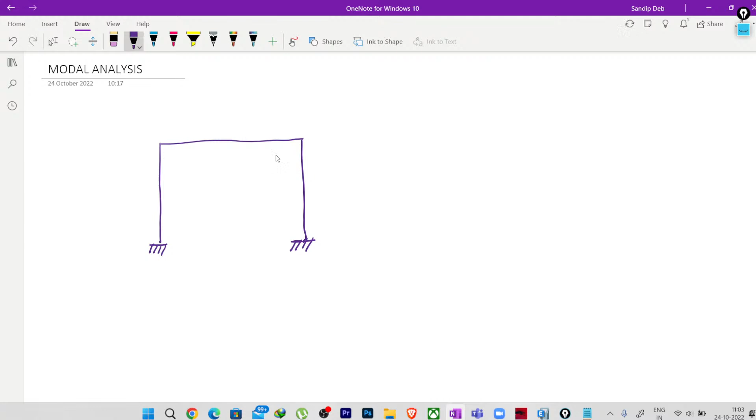So first, let us take a very simple frame like this. It is a very simple frame we have. Suppose this frame has total mass which is m1.

Now how do we idealize this particular structure? It is a 2D frame, suppose in x and z axis, the horizontal axis is x and the vertical axis is z. So how many degrees of freedom does this particular mass, or this frame, have? Can you tell me?

So it can move in this direction. You may say it can also move in the vertical direction if you have vertical acceleration, but that is a different topic. In general, if this particular frame can move or translate along the direction of x, we can idealize this as a single degree of freedom system.

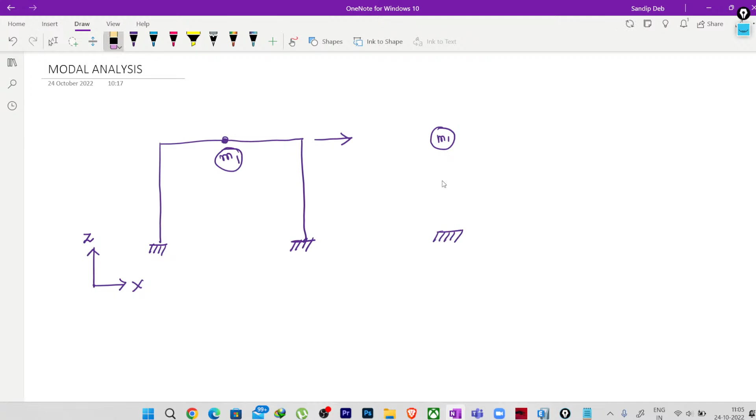So this is mass m1, this is y, and suppose we have some stiffness here, and it can translate along the x direction in both directions. Now if you provide or give any initial excitation to this particular structure -- suppose, as per Newton's law, if the structure is at rest, it will obviously always stay at rest unless we give some external force on it, right? So to make it move once, what you have to provide is an initial excitation to the structure.

Suppose we have given an initial excitation to the structure in terms of frequency, assigned to this particular frame here. Or let's not talk about frequency and make it complex -- let's just say we have given a push to this structure, suppose P. Okay, just give me 1 second.

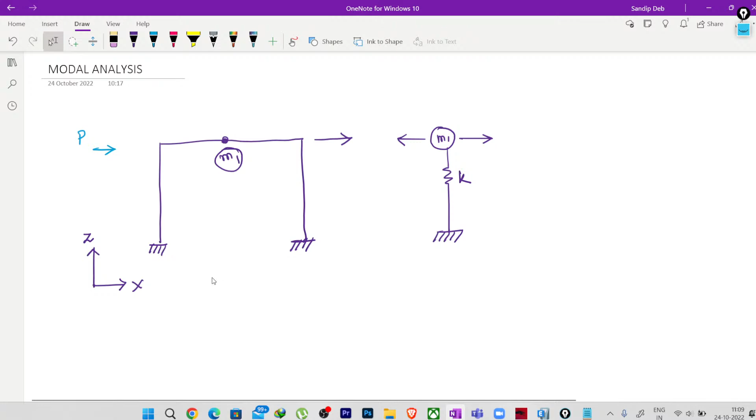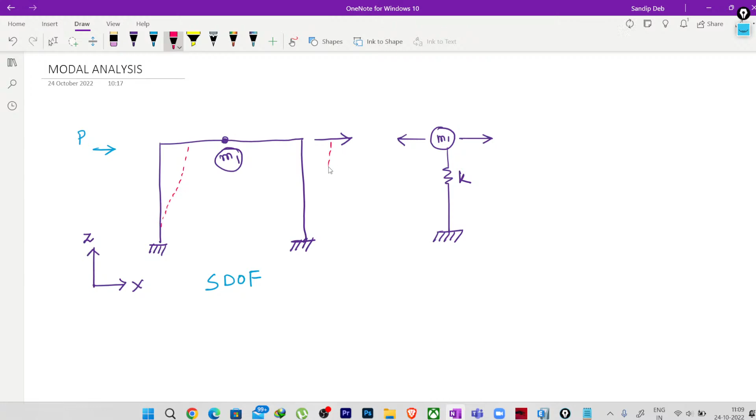This frame has one degree of freedom, so we call it a single degree of freedom system. Now if we give an initial excitation or initial force to this structure, the frame will start moving. How will it move? It will move to and fro, once in this direction and again it will come to this direction.

So we will get a displaced shape which is something like this, if we idealize this as a single... yes, is anyone telling anything?

If you have a question, you can ask me. Hello? Okay, so here it will move in such a manner. No audio, sir. No audio. Oh okay, sorry. Is it audible now? Yes, sir.

Okay, sorry, so what I was saying is that if we give an initial excitation to the frame, and as we are idealizing it as a single degree of freedom system, we will have this kind of behavior, that the structure will displace in this direction, and again it will move to and fro.

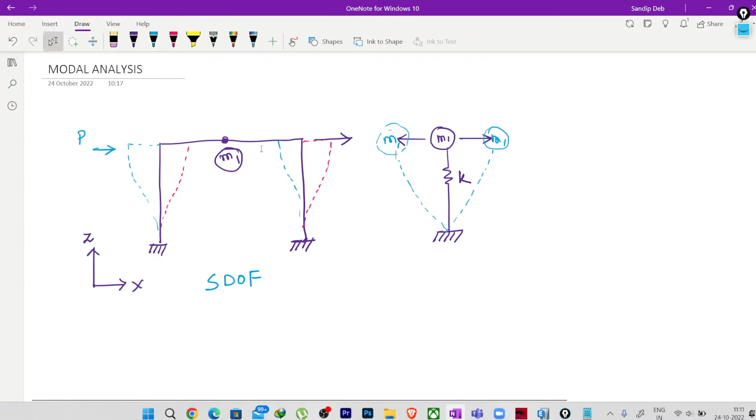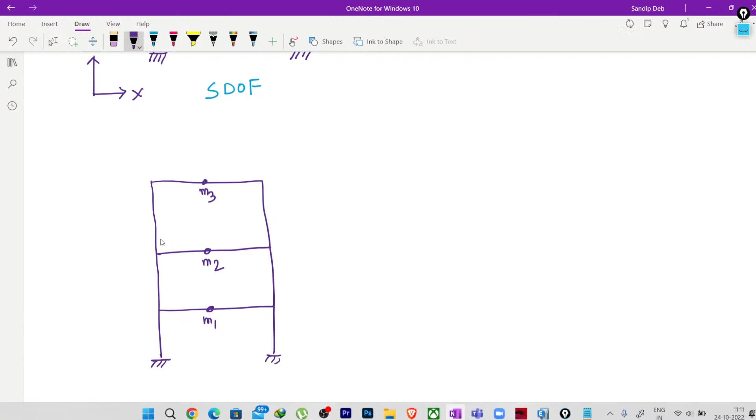Now let us take a frame where we have different masses and different levels. Suppose we have a frame like this, and now we have 3 floors. Here we have mass 1, here we have mass 2, here we have mass 3. So now how can we idealize it?

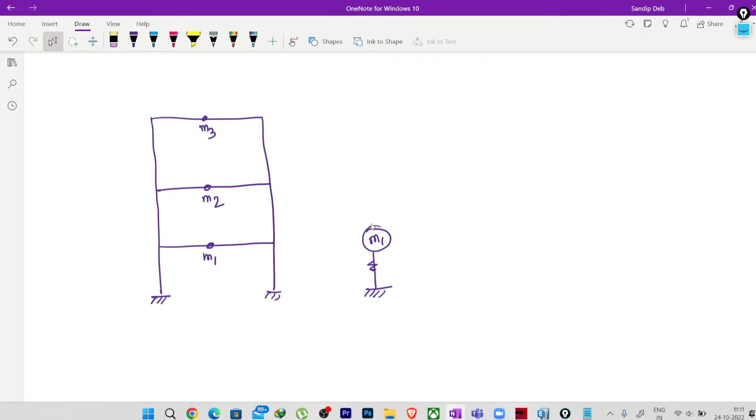If you see here, it will be something like this: Mass 1, suppose I'm not drawing the stiffness here, it is there, just M2, let me draw it so you don't get confused, and M3. So stiffness 1, 2 and 3 — these are the story stiffnesses.

This mass, where we are considering the mass of the whole particular story, is concentrated — this is nothing but the lumped mass. It is the point where we assume the whole mass of the story is concentrated. So why do we consider this at the floor level? Why not here, why not in between?

Because if you see, at the floor level we have the slabs, we have the beams, we have the slabs. So the more mass or more rigidity, we find at the floor level itself. Compared to the whole story, we have a higher amount of mass at the floor level. So that's why we consider the total mass of the story concentrated at this point, and this is nothing but the center of mass for this particular story.

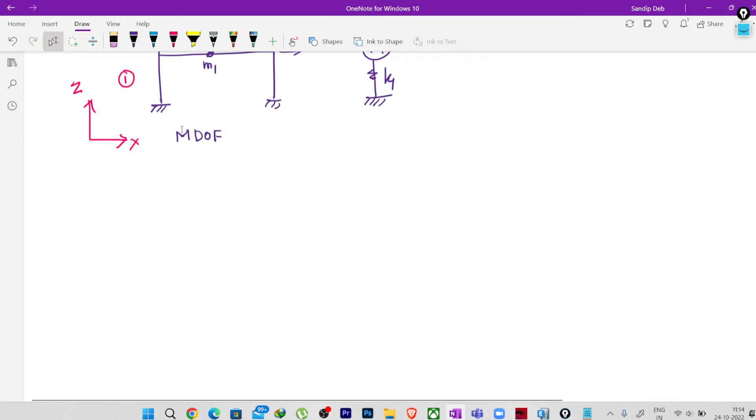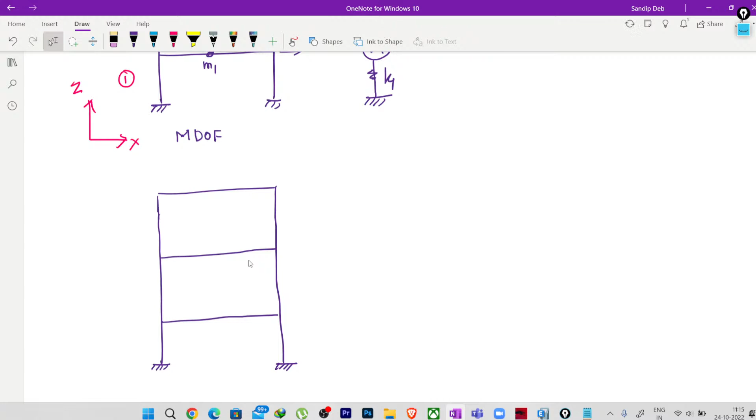So now, what is the expected behavior of a multi-degree of freedom system? Let me draw it again here. I will not go for solving those matrices, eigenvectors, or Ritz vectors here — I'm just giving you an insight into this concept. To understand the dynamics and mathematical formulation behind it, you can always refer to books, like Dr. Anil K. Chopra's, which is very famous for structural dynamics. You can have a look at it for better understanding of the mathematical formulation.

So now if I again write it: M1, M2, and M3, and we have given some initial excitation to the structure, what will happen? What we expect is that the structure will displace like this.

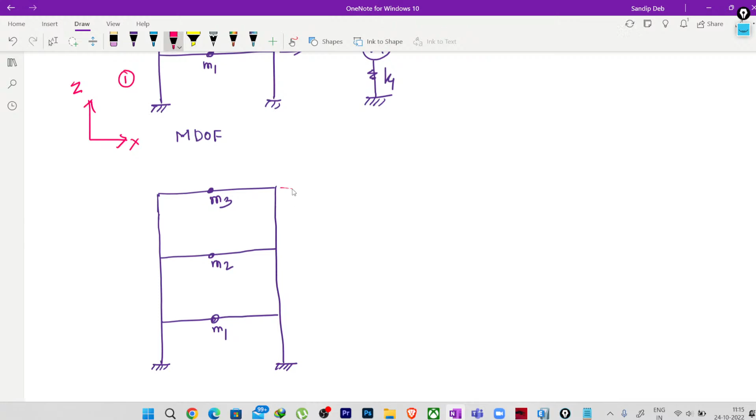Right? Okay, this is one behavior that we can expect.

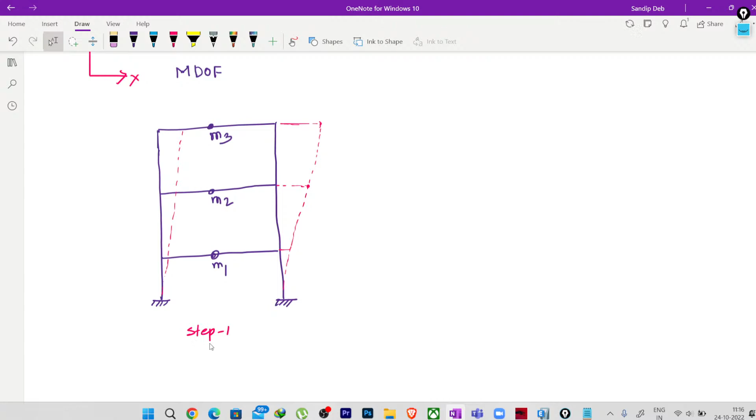So I'll write, suppose step 1. Okay, and we are getting these displacements at the different story levels. So if we consider this as direction 1 and this as direction 2, and if we consider this as story 1, story 2 and story 3, so how can we write these displacement shapes or the displacement values?

Suppose this is phi story 1 along direction 1. Okay, we can write this. Let me draw it in magenta color only, it will be better, I guess. So it is phi story 1 direction 1, phi story 2 direction 1, phi story 3 direction 1. Right, we can define these things like this. Like I have given phi, you can give any symbol to this.

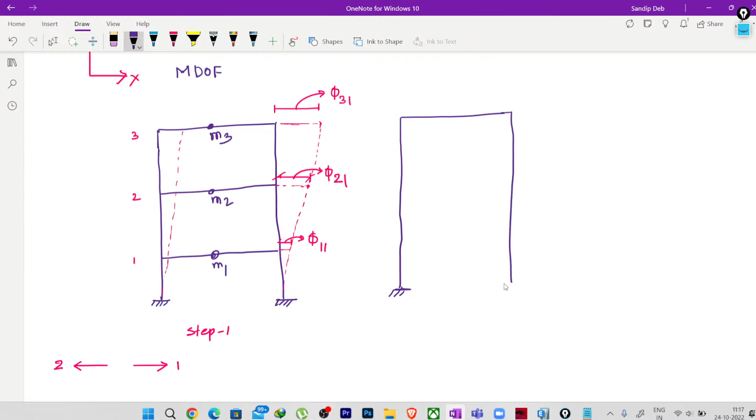Okay, now what is the next expected behavior? I'm drawing the ideal behavior of this particular frame, a multi-degree of freedom system here. So again we have M1, M2 and M3. So we had the displacement like this already.

Right, now what is the expected behavior? Now these two stories or these two masses can move in the other direction, like it will be a to and fro movement. So these two masses, suppose we are considering that this mass is not displaced from this position that we have got here, but the other two masses are displacing. So it can be like this.

As we have already said that these masses are allowed to move individually, so we can have a displaced shape like this. So here it is phi 1 1, here it is phi 2 in the direction of 2, here it is phi 3 in the direction of 2.

Right, now let us see another behavior. See, we have seen the individual movement of all the three stories. We have seen the individual movement of now 2 and 3 stories. Now again, if we break it more, M1, M2, M3. So now it can be

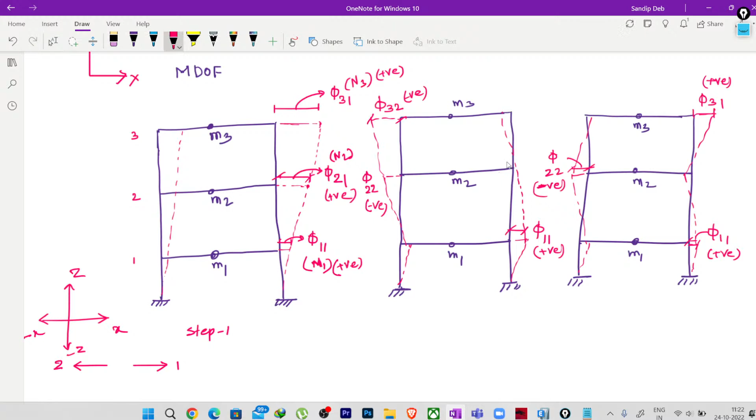Now here it is positive value, negative value, again positive value. So you can easily understand how it is displacing now. So some numerical value with the sign convention will give you a proper idea of how that particular point or how that particular story is displacing.

Okay, so any type of frame or any type of structure, if you give an initial excitation, it will have a fundamental behavior like this. If it is a 2D frame, it will have a fundamental behavior like this. Why? Because this 2D frame has only 1 degree of freedom. Okay, every single story has 1 degree of freedom, which is in x direction.

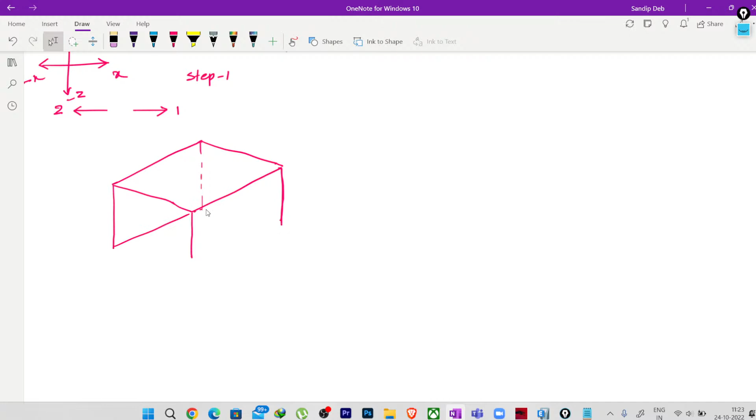Okay, so that's why it is moving to and fro in this particular direction only. Right? Now, if you imagine a 3-dimensional structure, if you imagine a 3-dimensional structural model like this, suppose... okay, so suppose it is a 3-dimensional structure. So now what can you expect from this?

Now how many degrees of freedom does each floor have? If I draw one single floor, we have x, y and z. So it has a degree of freedom along the x direction, which is the translational degree of freedom.

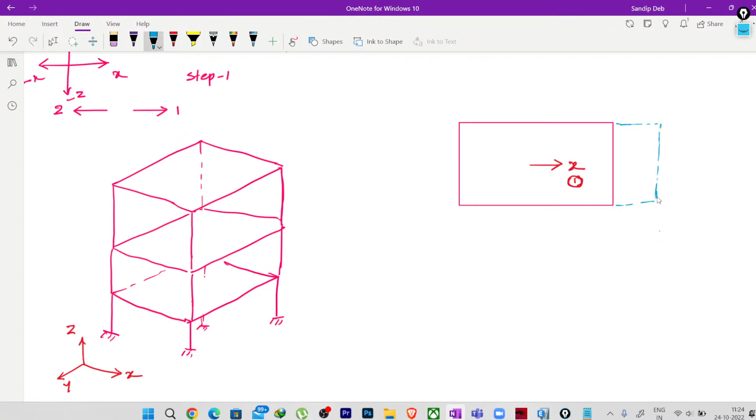That means this particular structure can translate in this direction, to and fro, positive or negative. Then it has another degree of freedom in this direction, so it can translate along this direction also.

So can you tell me, there is one more degree of freedom that we have for this particular plane. What is it? Rotation. Yes, so we have a rotational degree of freedom. It will be something like this, rotation about the z-axis.

So every single story in this particular frame, or in this 3-dimensional frame, has these 3 degrees of freedom: 1, 2 and 3. That means we can expect every single story to translate or rotate about the z-axis, or to translate along the x or y axis individually.

Now what is the ideal expected behavior? The ideal expected behavior is whenever it is displacing along the x direction, it will displace like this, meaning the whole story, all the stories, will be displacing like this. This is the ideal behavior for us.

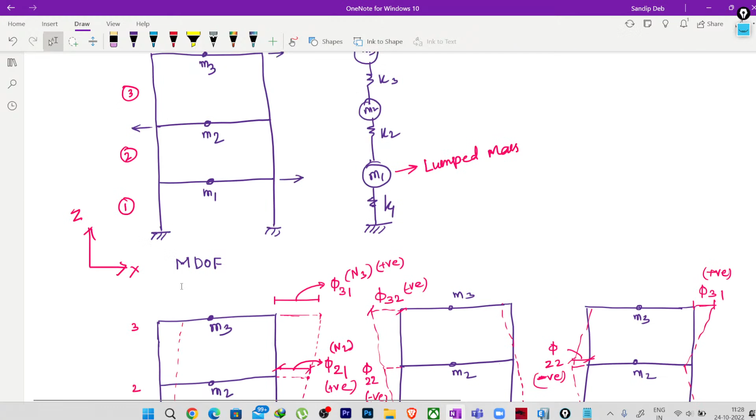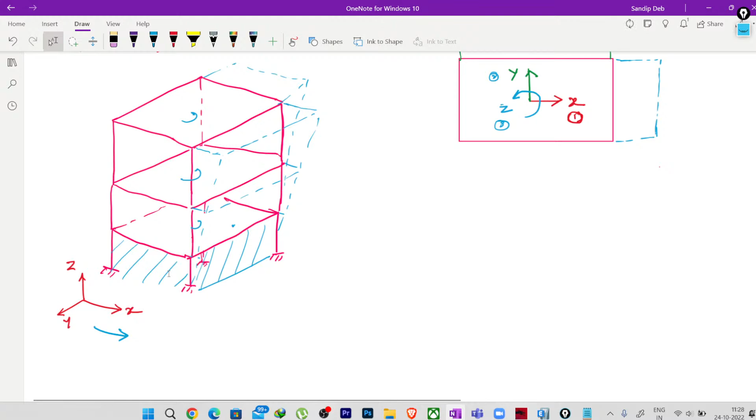So these displaced shapes, whether in a single degree of freedom system, a multi-degree of freedom 2D system, or a multi-degree of freedom 3D system, these displaced shapes are called mode shapes.

Now what you have understood from the mode shapes is that if we give an initial excitation to the structure, it behaves like this based on its degrees of freedom. So if your structure is subjected to any kind of lateral force in future, the fundamental behavior of the structure will be exactly the same as this.

Maybe the displacement will be higher based on the amount of force you are applying, but the shape you get at different time spans when the structure is subjected to lateral forces will be similar to the shapes we got from the initial vibration. We call these shapes mode shapes.

Now if the structure is subjected to any lateral force, you get this kind of displaced shapes — these are also mode shapes. Even if it is subjected to no force, initial vibration, and suppose there is no damping in the structure — damping meaning the internal friction.

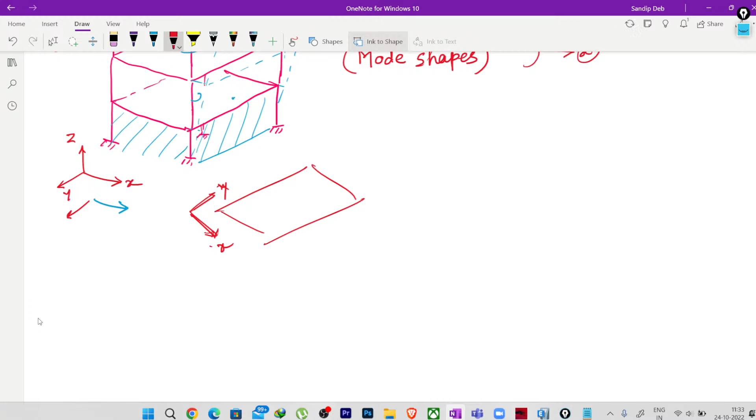Now this analysis of displaced shapes is based on the mass. Why are we talking about mass? Because let's talk about the earthquake force. The earthquake load is not an actual load.

It's not vibration, it's a ground motion. The ground motion or acceleration that we are getting in the ground causes inertial forces at the story levels. As it is an inertial force or inertial load, it will be acting on the center of mass of the structure.

Center of mass of the structure. Again, as we have already assumed, the total mass of the story is concentrated at one particular point, and we are considering these structures as multi-degree of freedom systems with lumped mass. So obviously the forces will be acting on the center of mass itself.

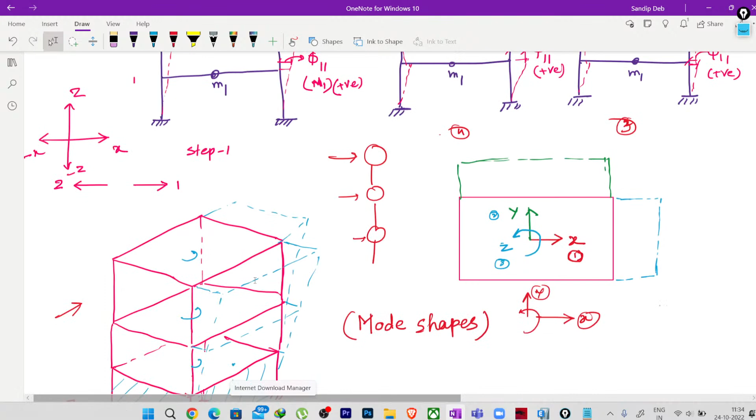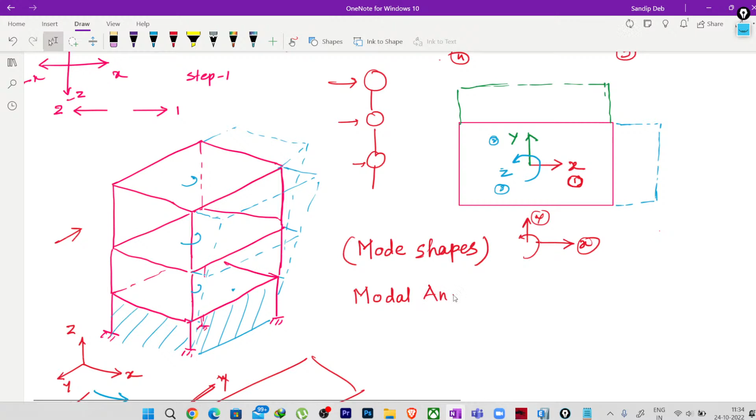So here this analysis of different mode shapes, or understanding its fundamental behavior, is what our topic is: modal analysis.

Now if you see, this whole thing is based on mass. That means to create this kind of displaced shapes, if it is a massless body, it is not possible. So there is some participation of mass here to create these particular shapes, because the mass is actually displacing.

Now at what extent this mass is participating in order to create this kind of displaced shapes or mode shapes, that also we can find.

So one more thing: as we have given some initial vibration to the structure, obviously the structure will be oscillating like this. As it is vibrating or oscillating, it will have a time period. An oscillatory body will have a time period to complete one oscillation, we call it time period. So suppose we get this particular shape at time period t1.

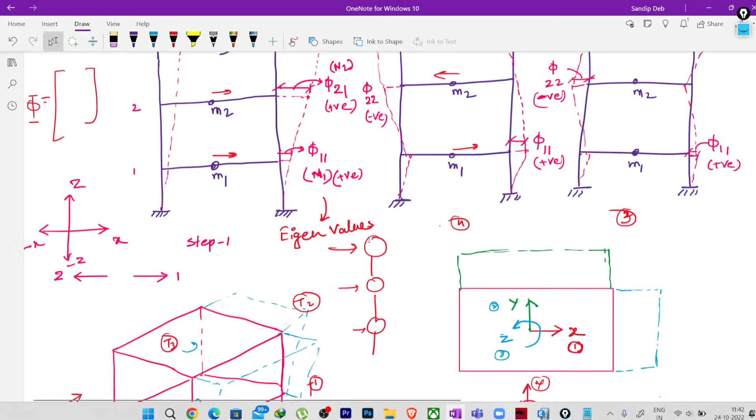Again, if you want to know about the theoretical or mathematical formulation of this modal analysis, you can always refer to the book of Dr. A.K. Chopra, Dynamics of Structures. This is the best book for this, and you can refer to other books as well.

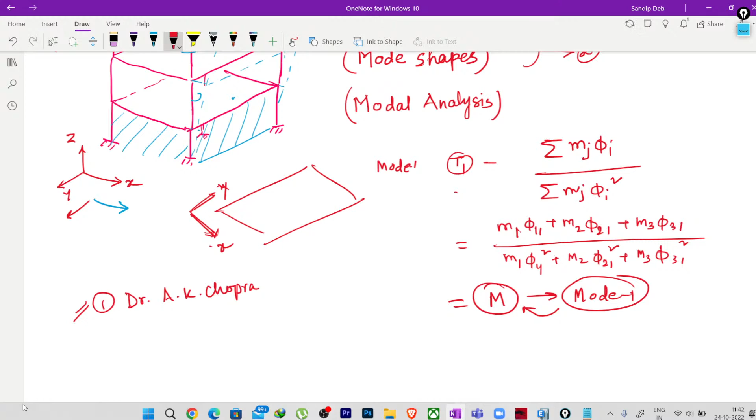So now we understood how the modal analysis is being done, right? Now if I just jump into the software, because finally we are going to do it in the software.

It is not possible for one single frame. You may find out the matrix and even see how it is behaving, but for a three-dimensional structure it is very hard for one to find it manually, right? So now we have this G plus 3 story structure, and what we are going to see is how this structure is behaving.

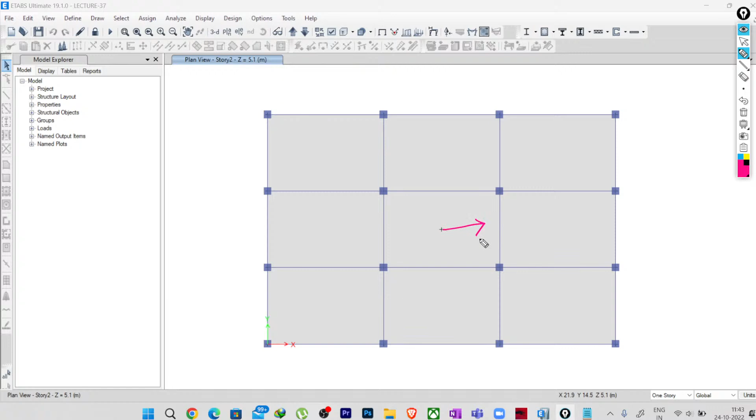It is a very simple structure, if you see in the plan view. So obviously we will not have any absurd behavior, we are not expecting some absurd behavior here. As a whole, we expect that this structure will displace along x, displace along y, and have rotational behavior. So it is called u1, u2 and u-theta. These are the fundamental behaviors as a whole.

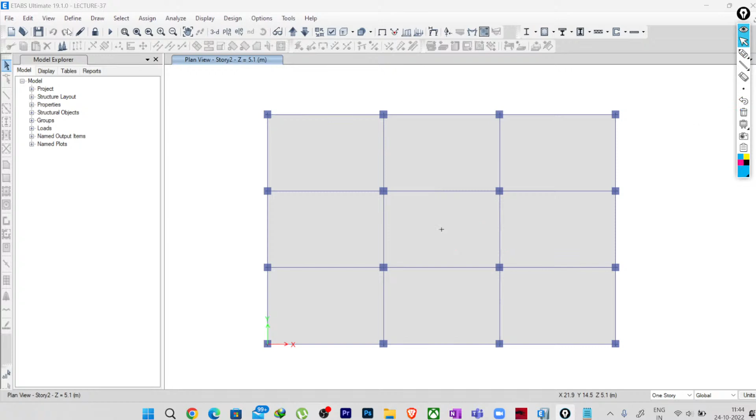Now if we just see the definition of modal analysis here, define load cases and modal. You can see here, I have given the name as modal, and here we have eigen or ritz vector. So remember, to understand if your structure is correct, or if your structure has any defects while modeling it, it is always better to run the analysis with eigen.

Even though you know the advanced process of applying the ritz analysis, it is always suggested to run the modal analysis with eigenvector first, because the eigenvector, if I say in general, checks the model as a whole.

So wherever there is any local vibration, suppose by mistake you have not connected this beam to the column, and it is not visible also in the model, what it will do is it will not understand this local behavior, because this beam will vibrate locally. It will show you that somewhere the mass is not participating, because if you include the whole mass, the beam mass of this particular beam is also included here in the M1. So somewhere you will see there is a lacking of participation of mass.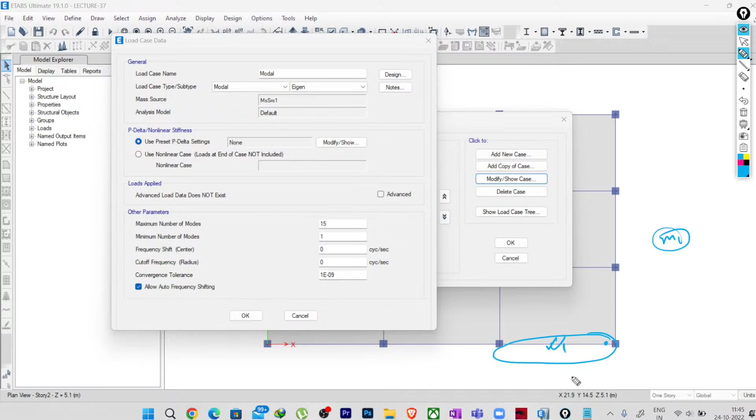From there you will understand that somewhere we have a local vibration and we have to correct it, and then you can go for the ritz analysis. Now what ritz does, you have a structural model and a small antenna. This same explanation you will find on YouTube also by the founder of CSI, Mr. Ashraf, who explained this, and the same thing is also written in the help documentation of ETABS.

If you open the help, you will find the documentation. So what ritz does, ritz also captures the local vibration behavior. So if this beam is behaving like this, it will not say that it is wrong, it will say okay, it is correct, and I will consider this vibration.

Okay, so to have a precise analysis, why is it the wrong process? Actually, why it can be applied here is that if you have a structural model with a bigger component and a smaller component on it or anywhere in it, to get the actual behavior of these smaller components, including the bigger component, we need to go for ritz analysis.

That's why most structural engineers recommend keeping the structural model as simple as possible. Do not model everything there. If you compare the behavior of this small element with the whole structure, suppose it's a 10 story building and there is a small antenna or pipe or small tower on it, how can you compare the behavior of this big structure and this small pipe? It is not possible, right?

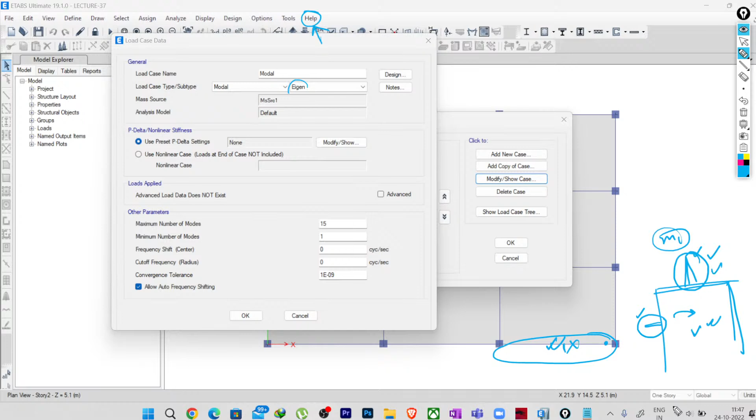Okay, so today we will not discuss that much. We will see the eigenvector analysis. Now, what is the number of mode shapes expected? Can anyone tell me? As we have already explained, every single story is allowed to move in its 3 degrees of freedom. Now how many stories do we have here?

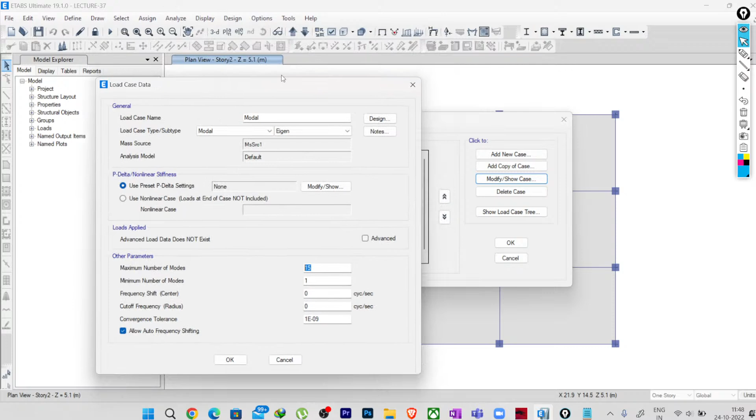If you see, 1, 2, 3, 4, 5 - 5 levels we have. So every single level is allowed to move in these 3 degrees of freedom. So how many numbers of mode shapes are we expecting? So this is 15, right? So it is 15, that's why I have written it as 15.

Okay, so now number of minimum modes - obviously at least one number of mode we expect. Now this frequency shift and cutoff frequency is not useful when you are doing seismic analysis, because this is the limit that you can set. Then what is the lowest limit of frequency from where it should analyze, and what is the highest limit of frequency that we should analyze?

Lowest limit we always keep as 0, because we also understand if there is any element which is very stiff, in that case the time period will be less. So frequency will be what? Frequency will be higher. So to understand all these behaviors, if you see, we have a response spectrum curve like this, right? For the static analysis we have like this.

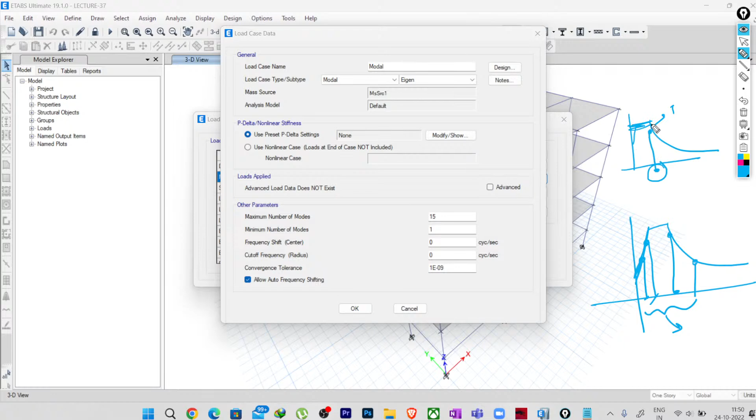So that's why it is not an issue for the dynamic analysis, but for the static analysis we always want to be on the conservative side. So that's why we are not considering this. So these things are the seismic analysis aspects. So I am not going to discuss this now. These two things are not that useful for us right now.

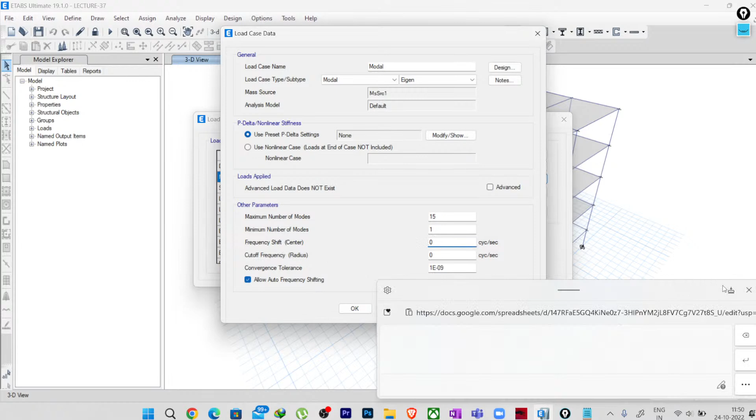Convergence of tolerance is also related to the frequency shift, and allow auto frequency shifting is also subjected to this frequency shift. So all these 3 options we will keep as it is. If you want to understand this, it is given in the help and documentation - you can read about it, but these are not useful for our daily practice.

Okay, so now I'll click on OK. It's already analyzed actually, let me analyze it again. So what is the expected behavior? The structure will move along X and along Y and about the Z axis at the very initial cases, right?

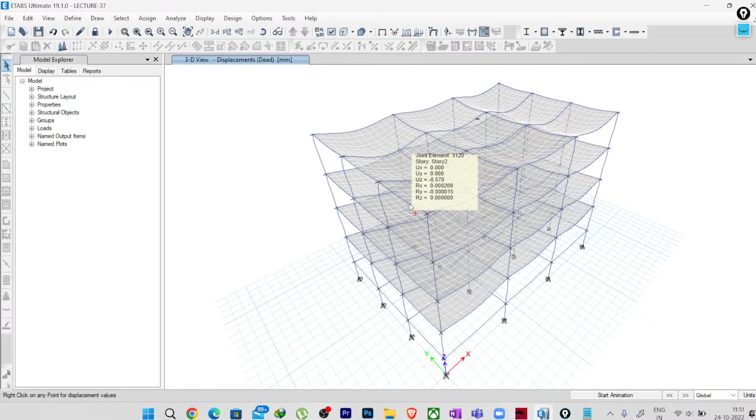So I'll go to my show deformed shape here. I'll go to mode - so here we have got mode number 1, and if I click on apply, are we getting the expected behavior?

The structure is moving along the X direction. Now if I look at this mode shape, what is the time period for this? It is 0.819 or something. This is the time period we are getting.

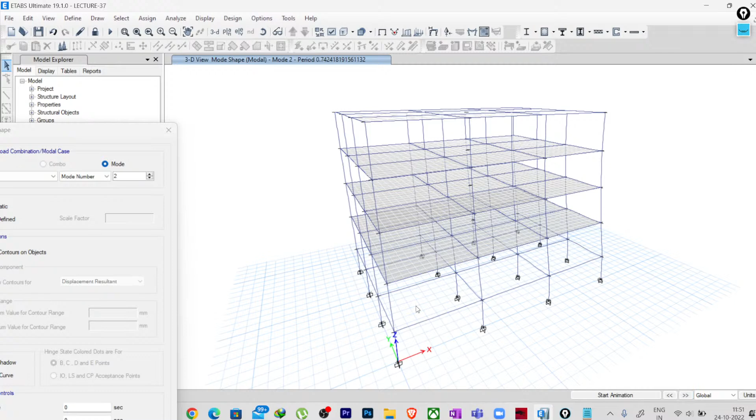Now if I see the next mode, what will be the next mode? Expected next mode is Y direction. So if I just show you here, and if you see the third mode, it will be rotation about the Z axis. Are we getting the rotation? If you see from the plan view...

Some of you may ask, is it compulsory to have the first mode in the X direction? Can't it be in Y direction? Obviously it can be in Y direction. So what we expect is that the first two modes will be translatory along any plan direction. This is the expected behavior.

Now, based on how the stiffness is distributed, suppose the stiffness is very high along the X direction, what will happen? The first mode will be along the Y direction and the second mode will be along the X direction. So based on your distribution of stiffness, it can interchange the plan directions.

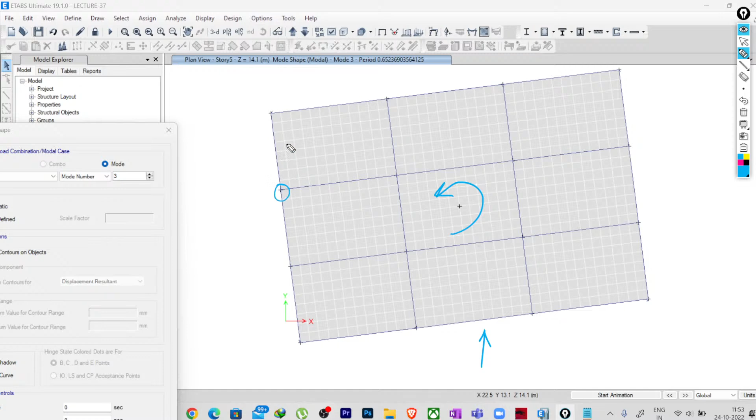But we do not expect rotational behavior in the very first mode, because in that case, when the structure is subjected to some lateral force from this direction, the structure will rotate like this. When the structure is rotating, the force concentration on these elements will be higher, which is not a desirable condition. That's why even the code says the first two modes should be translational and the third mode should be rotational, meaning it is asking you to have the very fundamental behavior for the structure.

Doesn't matter whether it is a circular shape or whatever shape it is, but considering the structure as a three-dimensional multi-degree of freedom system, whatever we expect from that as fundamental behavior should reflect in your structural model also. So now, how can you understand the rotation?

You will see there is an option called draw contour shape, contour objects, and I will go to displacement resultant, and again go back to the first mode. I'll click apply, so you can see now how it is displacing.

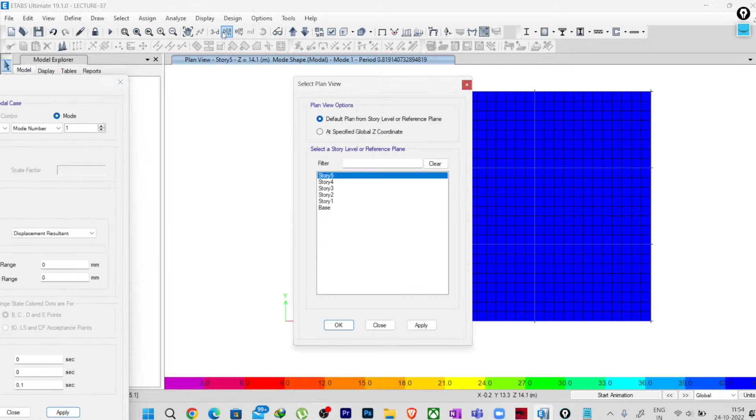I'll go to the 3D view. So what is this blue color? This blue color is showing us the maximum displacement, so obviously we expect the maximum displacement at the top. For the second mode, Y direction, and at the top we are having the maximum displacement.

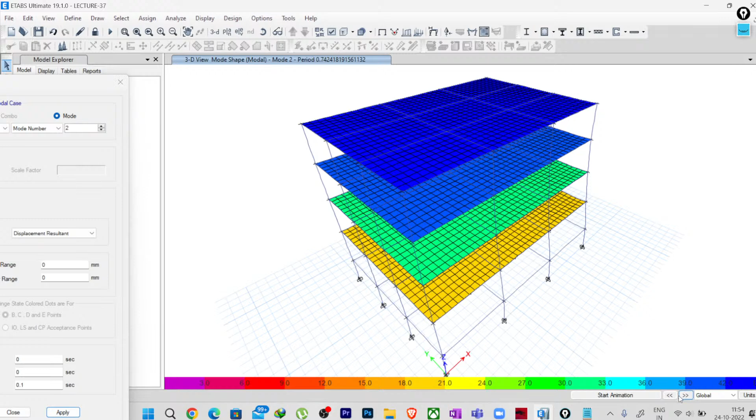Now this contour will help you understand the rotation actually. So I'll go to the third mode. Now you can see the rotation, it is rotating, keeping this particular point in the center.

So what does this mean? That means the center of rigidity, we consider that the center of mass is here, so the center of rigidity also coincides with the center of mass somewhere here.

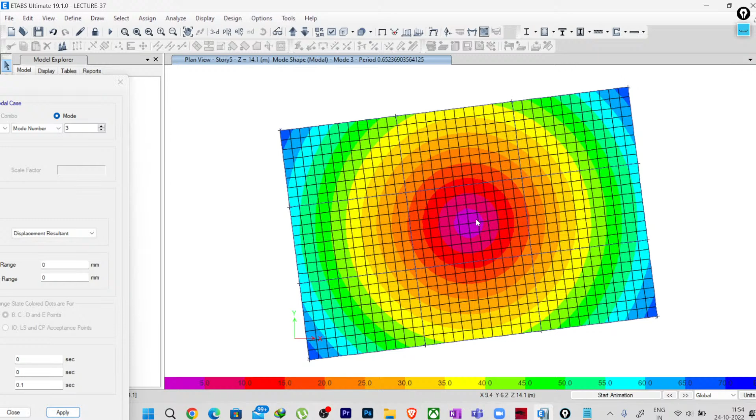Okay, so now if I just make a simple change, suppose what I have done is I have drawn a small shear wall here for the whole story, fine, and now I run the analysis.

Now what do you expect? Do you expect the same behavior? Let's see how it is behaving.

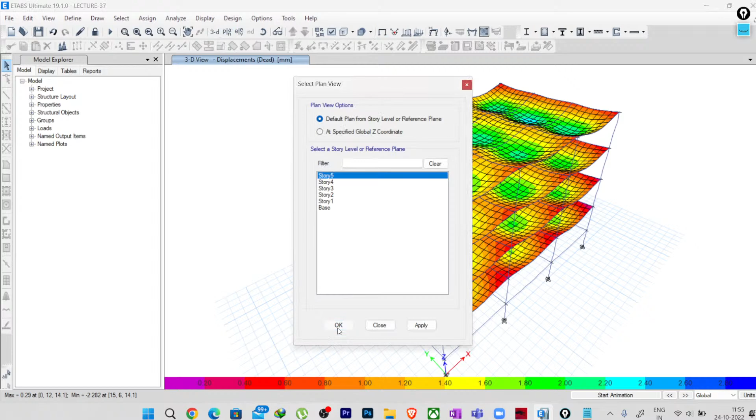I will go to the plan view of the top story and see the first mode. Mode 1, and apply. The first mode is okay. Why is the first mode okay?

Because we have given the shear wall in this direction. Shear wall is always weak in the out-of-plane direction, right? Now let us check the second mode.

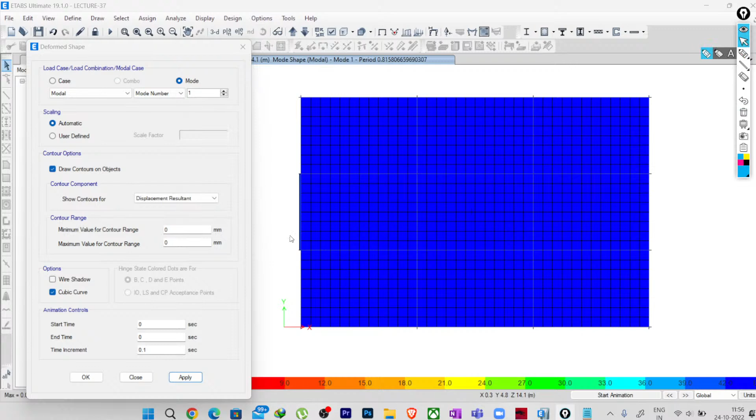So we expect the second mode to be translational along the Y direction. So if I just click the second mode, but it is not translating. Now you can see the second mode is rotational. Why is it rotational?

Because if you see, we have higher stiffness here, right? Let me go to the undeformed shape. Now we have higher stiffness here.

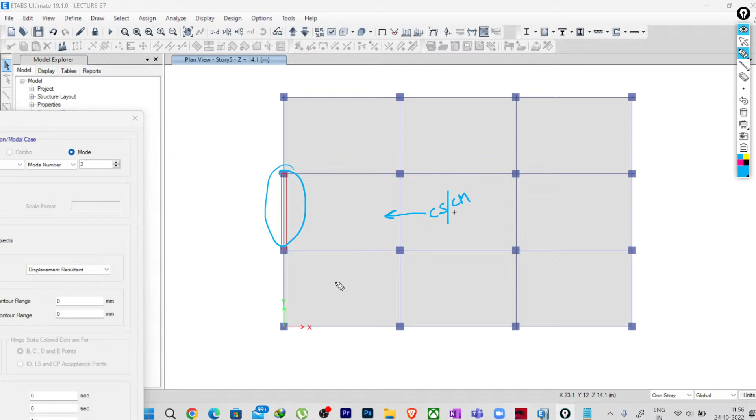So previously the center of mass and center of stiffness, or center of rigidity, was coinciding here. Now as we have increased the stiffness here, obviously the center of stiffness will be shifting towards this side. So suppose the center of stiffness is somewhere here now. The distance between this center of mass and center of stiffness is the eccentricity.

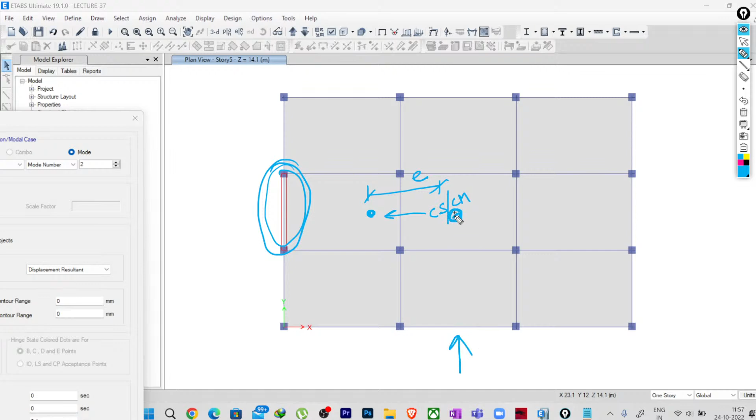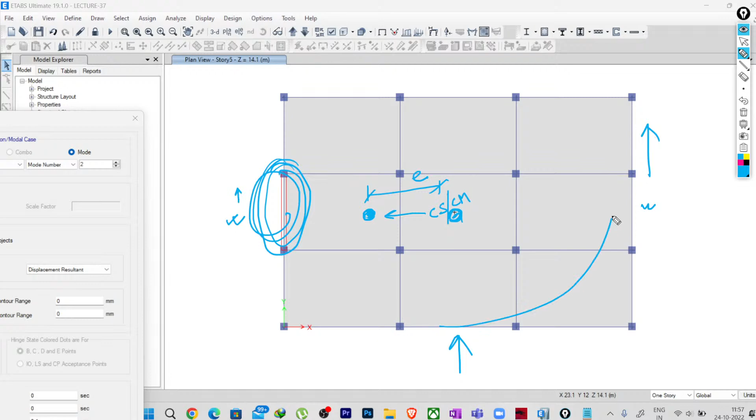So what will happen? Suppose I have grabbed this area firmly and applied the load. The load will be applied on the center of mass somewhere here. I have grabbed this zone here, so obviously this zone will try to resist the force, and as this zone is having less stiffness, it will translate more. So it is not translating less, it is translating higher, so obviously we will have a rotational behavior like this, right?

This is what we got in the analysis result also, right? So it is showing in this direction. Actually it is okay, same thing like this.

Okay, so how is this contour value helping you? This contour value is giving you the displacement shape values. The blue is the highest displacement, the magenta is the lowest displacement, right? So that means these particular corners are displacing higher compared to this. So that means the concentration of rigidity is higher here compared to this.

Now what you have to do, what is the measure? You have to increase the rigidity in this direction, right? This is the measure. Now you can do that, like I have just assigned shear wall just to explain you. It can happen due to the column orientation also.

Suppose all these columns are oriented like this, and here all these columns are oriented like this. So what will happen? This particular direction has more rigidity and this particular face has less rigidity, because the column dimension or orientation we have changed, right? If you see, the higher dimension means higher rigidity. So in this case also you may have the rotational behavior. You have to check actually.

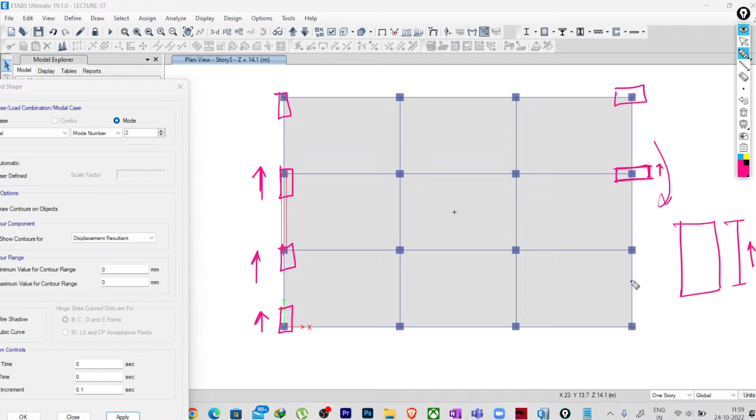As a whole, the distribution of stiffness and mass will affect your modal behavior, and understanding that from the contour you can assign frames or shear walls wherever it is required to control that rotation, right? So now let me show you one more thing I was talking about, which is mass participation.

We are almost at the end of this session actually, so just one last thing that I will be explaining. Okay, let me analyze it. So by seeing the mass participation values also, you can easily understand how the structure is behaving.

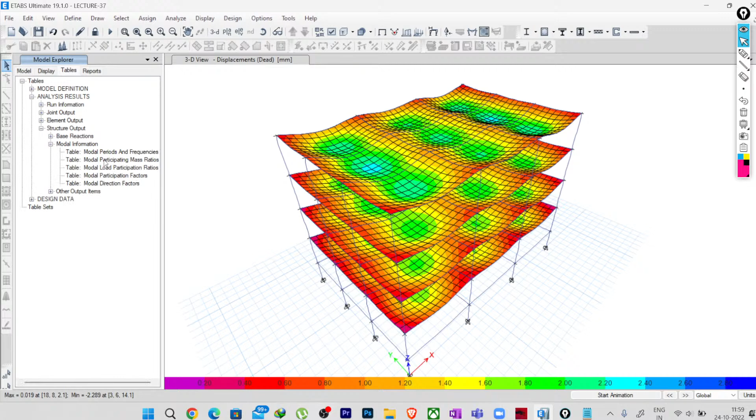Okay, so if I go to tables, analysis results, structure output, modal participating mass ratios. So here is the table. So we have 15 modes.

Now at the very first mode, the mass participation is higher at what direction? If you see, we have ux, uy, uz, rx, ry, rz - individual directions, translational and rotational. So our concern is these two and the rotational, because we have 3 degrees of freedom, x, y, and rotation about z, right? So for the first mode, the mass participation is

83% for the ux direction, that means x direction. So what do you understand from this? That the total structure is moving along which direction? X direction. If you see here, there is no other participation in the y and z. So it is ideally moving in the x direction. For the second mode, it is ideally moving along the y direction.

For the third mode, it is ideally rotating about my z axis, the third degree of freedom. So it is the as a whole behavior. Now if I see the individual

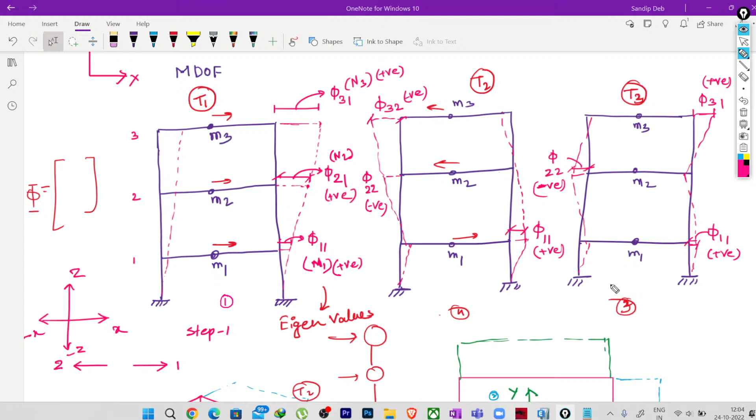So what we expect is to understand the whole behavior of the structure, combining all these modes, mode 1, 2 and 3. So here we understood the complete behavior of the frame. 90% mass participation means you have covered most of the behaviors. Obviously there will be some lacking, some mass which may not be participating, but the maximum behavior you have considered or checked in your structure.

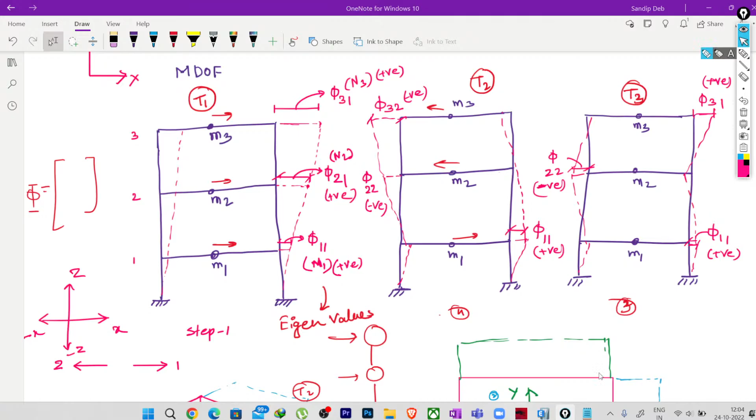Why is it very important? Because whenever you do response spectrum analysis, these directional behaviors will actually be used in the response spectrum. There you will provide some acceleration, and that will be multiplied with the behavior we get in the modal analysis, giving us the structural response. That's a different topic, we may take another session about it in detail. So this modal analysis is very important, both for initial understanding of structural behavior and for response spectrum analysis, meaning dynamic analysis of the structure.

So here you can see the summation of all the modes, mass participation is 95% for each plane direction, x and y. So it is correct.

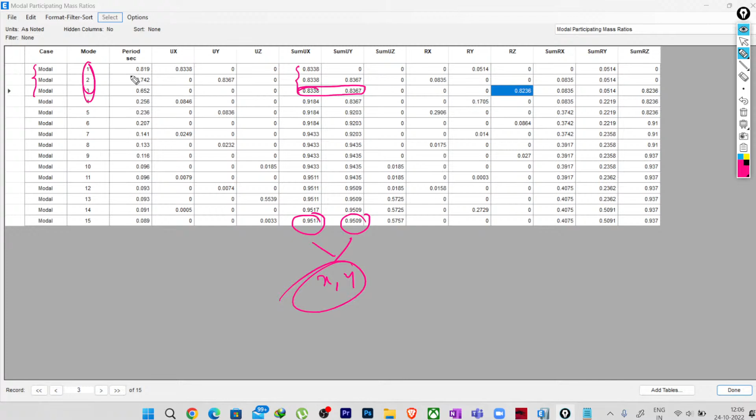There are some engineers who say that mass participation is for the first three modes, so they consider the first three modes as a whole, and say that for the first three modes it is more than 65% here. But it is not correct at all. If you see the code, it is clearly written that the first three modes in each plane direction.

So do read this thing also, do not read only 'first three modes' - it's first three modes in each principal plane direction, meaning x and y. So you have to find out the mode shapes of each plane direction, 1, 2, 3 and 1, 2, 3. You add it up, and if it is 65%, it is okay.

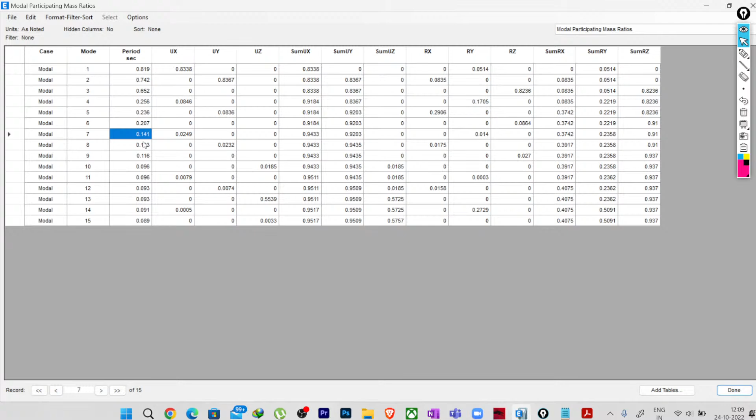Okay, so I hope this mass participation concept, the modal analysis concept, is pretty clear. I have not explained this in theoretical terms, like how you will be solving it out by hand, but as a practicing engineer, how it will be useful for you. It will help you rearrange your framing and understand how your structure is behaving at the very initial stage.

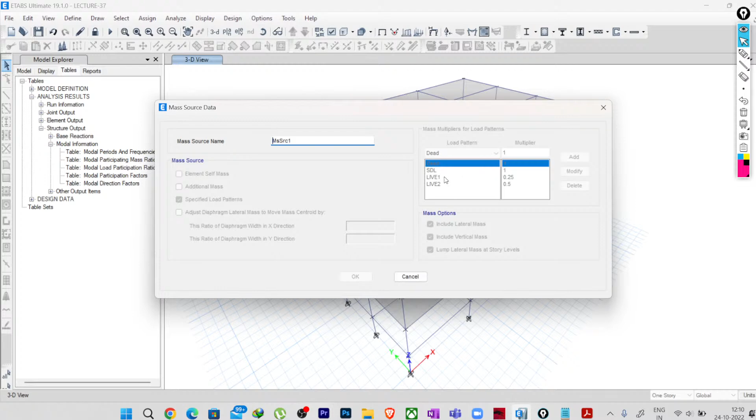So doing this at the very initial stage, remember one thing: whenever you are analyzing the structure for modal analysis, the mass you have to define in ETABS, actually mass source. What mass source have we considered? We have considered the mass source as per the seismic mass: 100% of dead load and 25% or 50% of live load based on its extent of loading. This is because most of the time this modal analysis is going to be used in the seismic analysis of the structure, so we have considered the mass as the seismic mass.

Obviously you are allowed to check for only dead load, you are allowed to check for only live load, that is also possible, but initially we do that actually. So I think we have covered everything today. Any question, if anyone has, you can ask me now.

Anyone have any question? Yes, a question, just a simple discussion. Just one second, give me one second. Yes, tell me. Hello, just a minute sir, just a minute. Yes, yes.

What I want to discuss is, as you told us that while doing the initial modeling with dead loads only, we can check this modal mass participation. Exactly, 100% correct. But as per experience, what I have observed is suppose we have set the performance of the building, later some loads are changed, suppose there is an increment, so after doing that what I've seen is the performance is compromised. Obviously, what I said, you are allowed to do that with the dead load also.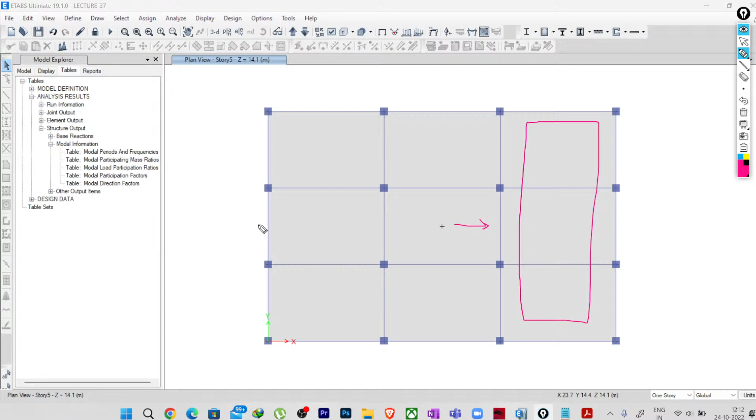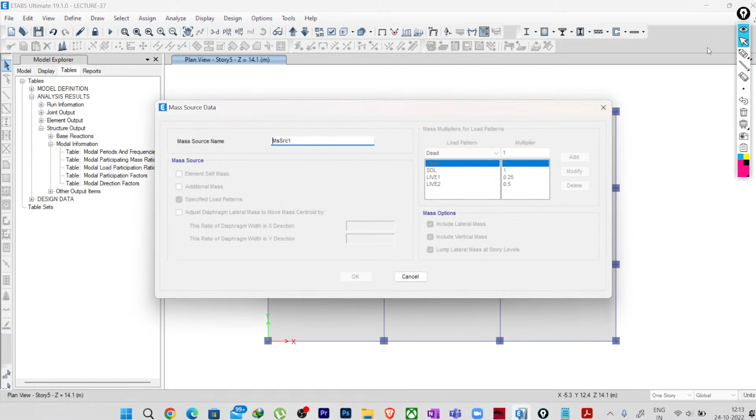Right, so what I said: initially when you are modeling it, you first check with the dead load, then you decide the framing, then you apply the live loads. If you think that we have some live load particularly concentrated to some corner or direction of the building, in that case it is always better to consider the live load and dead load together, and then analyze the structure, as we have done. If you see in the mass source, what we have done, we have already considered dead load and live load. This is the actual thing you should do, unless in general buildings we hardly have any such concentration. Like in this particular model, we don't have any such problem.

Yes, any such problem, that's why you can do that here for the dead load itself. You are talking about a very simple structure. Yes, very simple structure I was saying. So when you are doing something complex like apartment buildings or non-planned buildings, you may have some generators and all these vibratory machines, so obviously in that case you have to consider the load of those things also during the modeling.

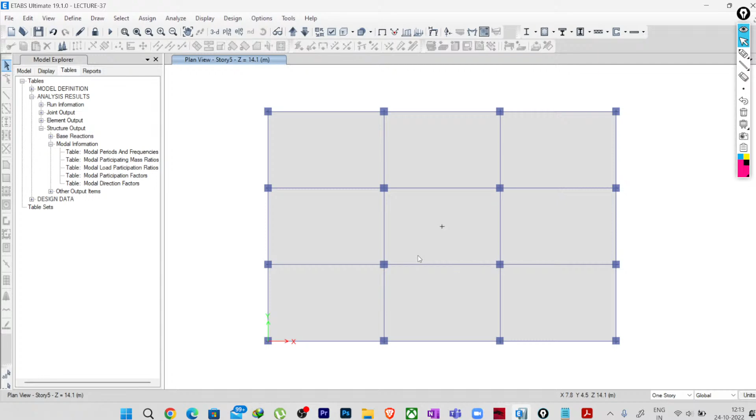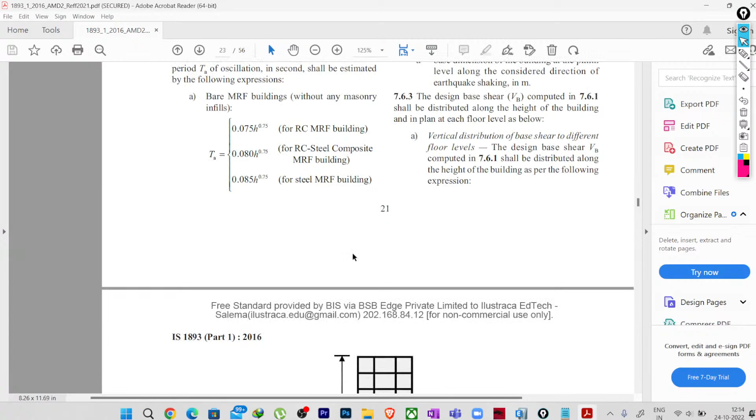Thank you. One more thing, I haven't observed any clause in the code like what should be the difference, ideally, between the center of rigidity and the center of mass. Yes, I'm telling you there is no such clause that tells you what is the expected eccentricity we should consider, but there is a clause which says if there is any eccentricity, then that eccentricity should be taken as the torsion due to the eccentricity that will be coming. It needs to be considered in the analysis.

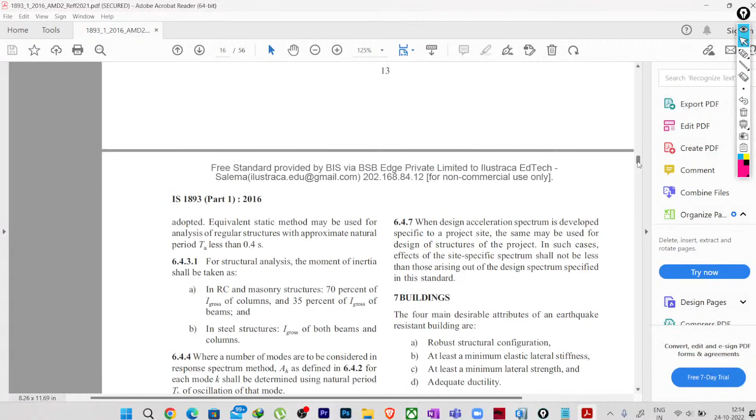So if you see here, let me check in which page it is. Like the static and design eccentricity, it says actually. Let me check where it is.

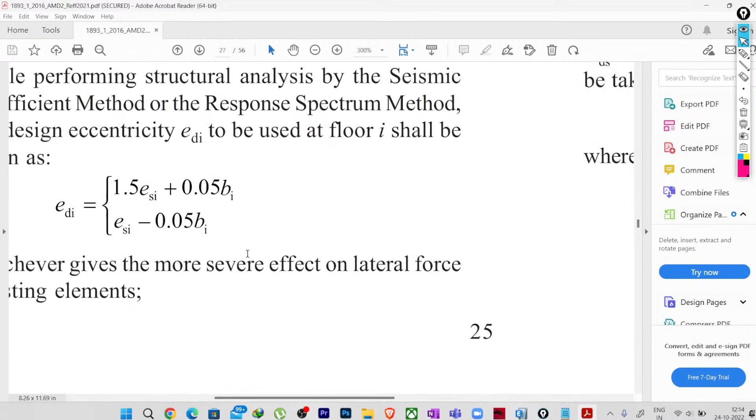The code does not mention any expected eccentricity or limitation in the eccentricity. There might be eccentricity available in the model, but if the eccentricity is there, you must consider this.

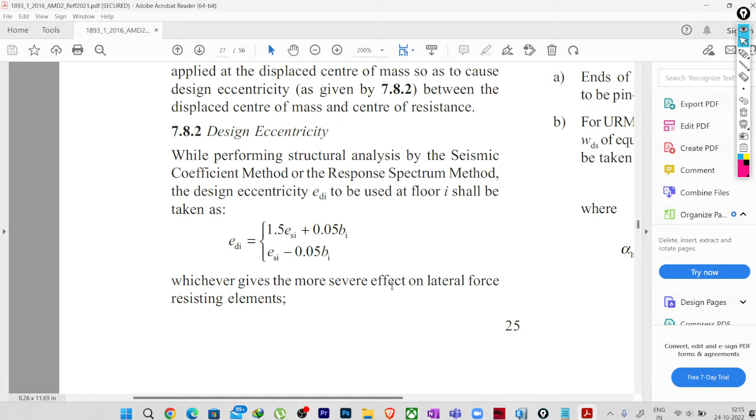This design eccentricity needs to be considered. This design eccentricity is applicable in case of static analysis in this software. But in case of dynamic analysis, we are already evaluating the dynamic response of the structure, so there is no requirement of assigning the eccentricity.

Whatever eccentricity is there, in static analysis we expect the structure to behave like this. In dynamic analysis, it can be like this, like this, like this, based on the mode shapes we are considering. So even if there is any eccentricity of load or stiffness in the structure, it will already be covered in the modal analysis and assigned in the response spectrum also. So there is no requirement of assigning any eccentricity again and checking for that.

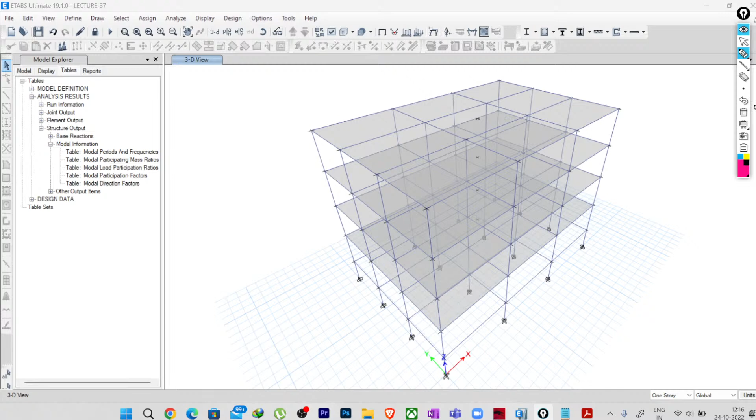Okay, so does anyone have any other question?

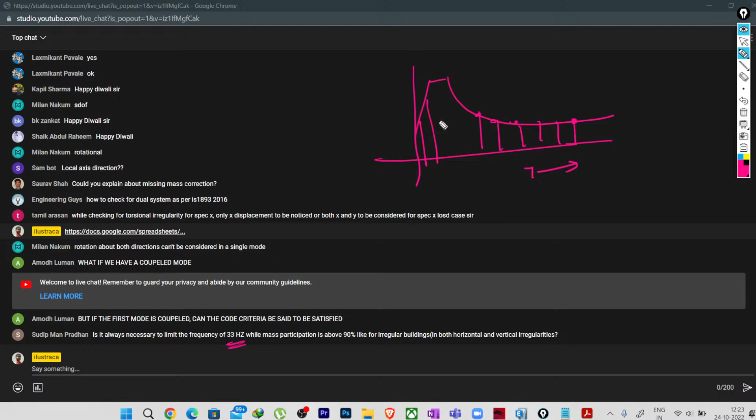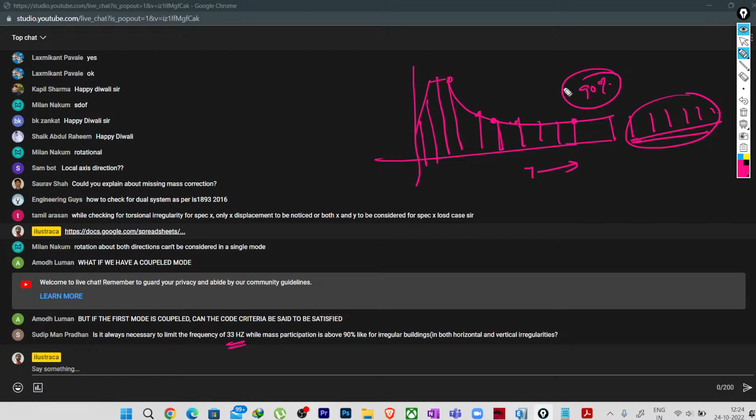Yes, hi Abu. Any other question?

So I was taking one question, how to check dual system as per IS 1893. I didn't get your question actually, how to check dual system as per IS 1893. Dual system is just a structural arrangement, a lateral load resisting arrangement. That is what dual system is. How to check means the fundamental behavior will be same for all.

I think he's asking about 25% column, 25% base shear in the columns and shear walls. That is again a different topic, let's not dig into it. It's not a big deal actually, you have shear walls, you have columns like this.

Okay, you have base shear in these points, the base reactions - suppose A, B, C, D here, A, B here. You add up all this, or you just get a base shear value. You get some base reaction here, here, and all these shear walls.

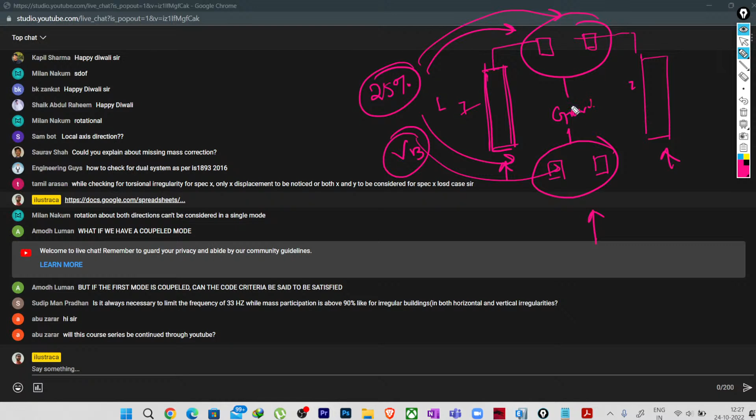So how to check? You just check the base reactions from column and shear wall. Check the total base shear resisted by the columns, and compare with the total base shear to get the percentage. If it's more than 25%, you can design it considering the system as a dual system.

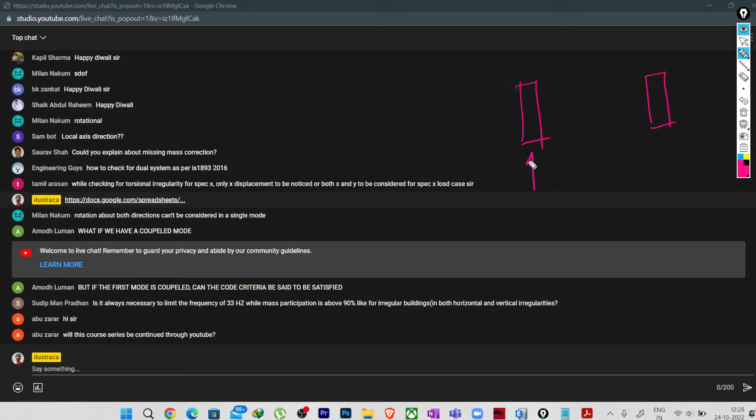Now you may say that in ETABS, if we model the shear wall, most of the lateral force gets concentrated on the shear walls itself, right? So in that case, what you have to do is design the columns accordingly.

If you want the structural model to be a dual system, you may have to design the columns for some higher factor of safety, or higher partial safety factors, and then assign that size in the structural model, and check whether the column is resisting 25% of base shear or not.

So this is some iteration you have to do. Actually, it's not that easy. It's some iteration you have to do, and then check whether it is a dual system or a structural wall system.

Yeah. What if the first - okay, it is always necessary to, okay, fine.

No, actually we have only 3 days workshop or 3 days boot camp, where we have covered beam design, column design, and modal analysis today. So this is the 3 days. Maybe in future we will cover some other topics also.

I have holiday from my office, so in this holiday I thought of spending the time with all of you guys doing these things. Local axis direction, I didn't get actually, Sam, what you wanted to ask. Actually, missing mass correction, we will take it up later.